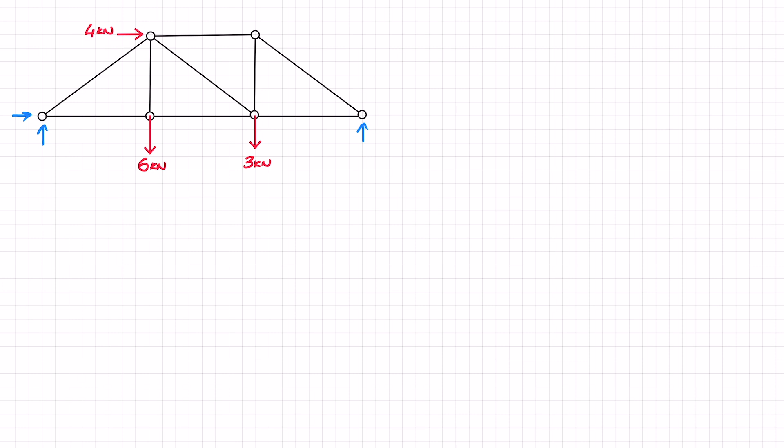Let's start off by drawing a free body diagram. That means that we are going to replace our supports with the reaction forces. So here on this side we have a pin support. Just going to rub that out and draw in its place two reaction forces. And I'm going to rub out this roller support as well and draw in that one reaction force for the roller support. Okay. Now that we have our free body diagram, let's check if this truss is determinate.

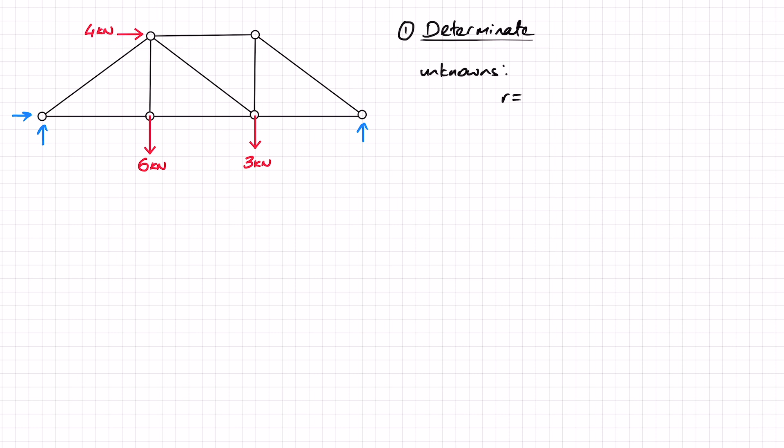So we'll start off by figuring out what we do not know. So what are our unknowns? So we don't know the reaction forces. In this case, we have 3, right? And we do not know the internal forces in the members. In this case, we have 1, 2, 3, 4, 5, 6, 7, 8, 9 members. So together, that gives us the number of unknowns as 12.

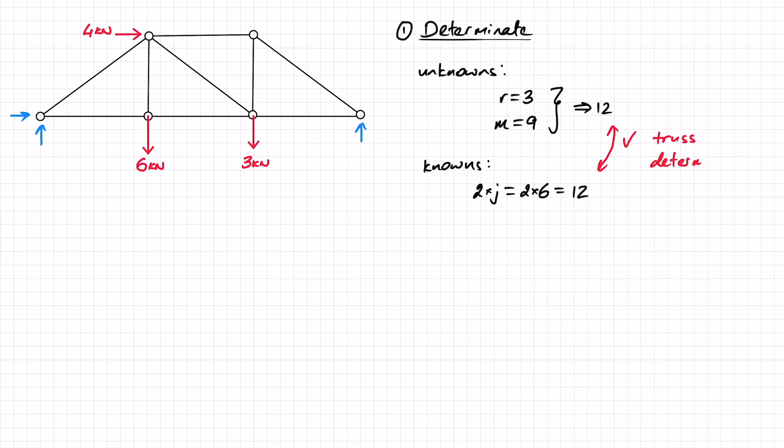On the other hand, we do know that at every single joint, we can write 2 equations of equilibrium. So that means the number of knowns is 2 times the number of joints, which in our case is 2 times 6 joints, and that gives us 12. In this case, the number of knowns and the number of unknowns are equal, so this truss is determinate, and we can solve it using the method of joints.

Before we start solving, let's number the joints and declare our sign convention. So, numbering the joints, I'm going to go with 1, 2, 3, 4, 5, and 6. And as for sign convention, I am going to use the right-hand rule, which means that my positive x, my positive y, and my positive moments are in these directions. Okay, so right hand rule. Now that we've established that, let's move on to finding the reactions.

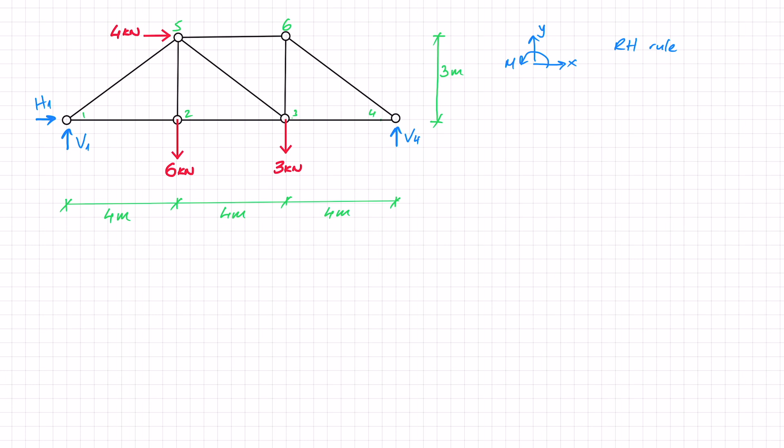In order to do that, I am going to label these reactions. Here I had a pin joint, and I'm going to label this V1 for vertical 1 and H1 for horizontal 1, and here I'm going to call this V4, the vertical force at joint 4. And that's it, we're ready to find reactions.

Let's start here with the horizontal direction. So sum of forces in the x direction equals 0, and just a reminder that this is my positive x direction. So I've got H1 in the positive x direction, and I've got that external load of 4 kilonewtons at joint 5 also in the positive x, so plus 4 equals 0, and H1 therefore works out as minus 4 kilonewtons. And I'm just going to highlight that quickly so that I can easily find it later when I need to.

The next thing I'm going to do is the sum of moments, and I'm going to do them around joint 1, with a reminder that this is my positive direction. The reason I'm doing it at joint 1 is because V1 and H1, those 2 reaction forces, pass through joint 1, meaning they will not contribute moment. I'll have all the external loads contributing to moment and V4 also contributing to moment. This will allow me to find V4.

Okay, so let's start off with this 6 kilonewton force. We can see that it is contributing a clockwise moment, which is negative in our sign convention, and the perpendicular distance from the line of action for that 6 kilonewtons until joint 1 is 4 meters. So minus 6 times 4. The 3 kilonewtons at joint 3 also contributes a negative moment, and this time the distance is 8.

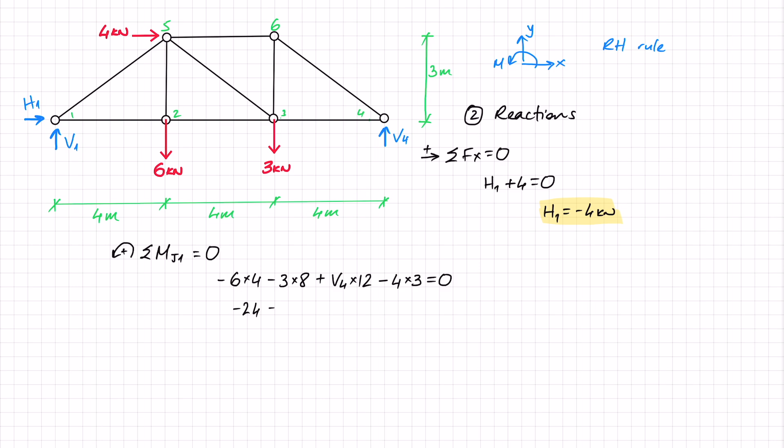Let's work our way through this. So -6 times 4, that is -24. -3 times 8, also 24, so another -24. Plus 12 V4 and -12 equals 0. Let's isolate the V4. So I've got 12 V4. Since isolating the V4 gives me negative and negative on the other side, I can multiply by -1 and it'll be positives on both sides. And here I have 24 plus 24 plus 12, which gives me 60.

60 divided by 12 is 5, and therefore V4 works out as 5 kilonewtons. Okay, let's highlight that as well. And now the easiest thing to do is sum of forces in the y direction equals 0. This is my positive y. So in this case, I've got V1 plus V4 minus 6 and minus 3 equals 0.

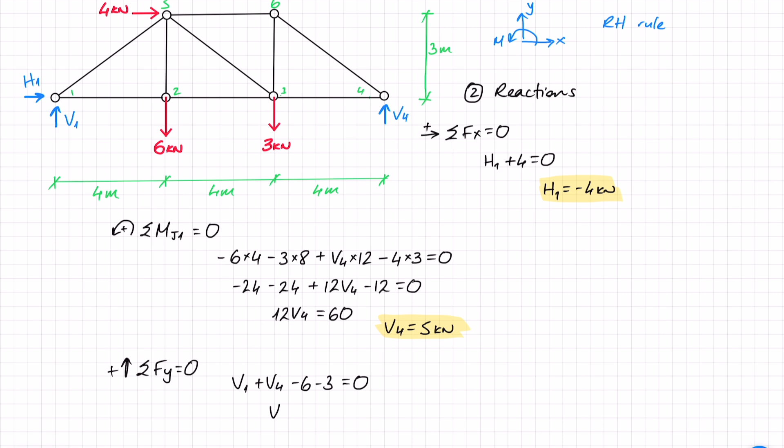So V1 equals 9 minus V4. So that is 9 minus 5. And I end up with V1 equals 4 kilonewtons. So now that I know all of these reaction forces, I can replace them in my graphical drawing. So we said that V4 was 5 kilonewtons. V1 worked out as +4, meaning we assumed the right direction, so 4 kilonewtons.

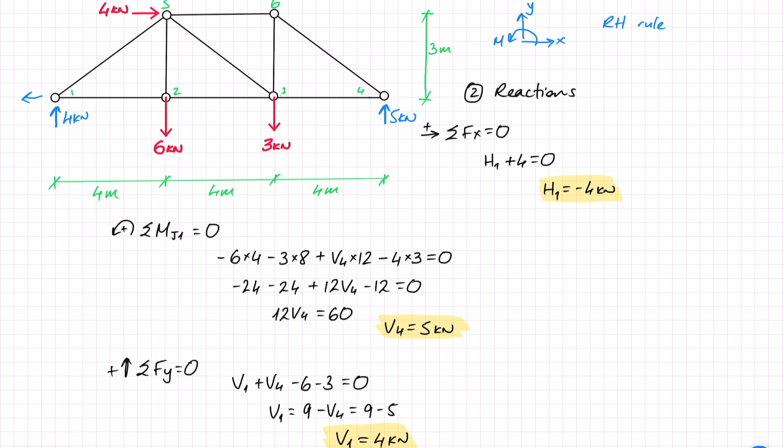And H1 was -4. This means that the direction that we assumed is incorrect. It's really facing the other direction. So what we need to do is just replace this with an arrow going the other way and with a value of 4 kilonewtons. And that's it. Now that we've found the reactions, we can move on to solving the truss using the method of joints. Before we start solving, let's quickly remind ourselves of what the method of joints entails.

What we do is we separate each joint from the members, draw the internal forces, and look at each joint as a system of concurrent forces at the joint. So looking here at the truss that we have, in purple I've drawn out all those forces that we need to find, all those internal forces representing the members. I have in red the external forces that were given as part of the truss, and in blue I have the reaction forces that we just found.

I know that in each joint I can only write 2 equations of equilibrium. So in each joint, essentially, I can only solve 2 unknowns. I will therefore have to start off at a joint with only 2 unknowns. If I look here, quite a lot of the joints have much more than that. For example, 5, 6, 2 and 3 have much more than just 2 unknowns. I can see that both joint 1 and joint 4 have 2 unknowns, and I could start with either of them.

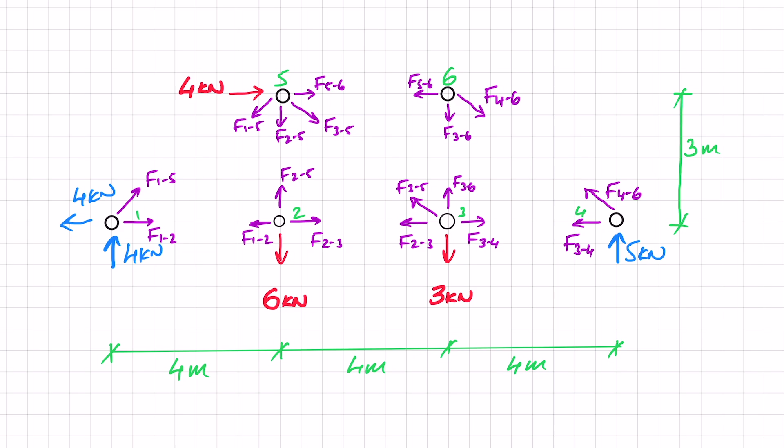Once I've found the members from joint 1 or 4, depending where I start, I will start finding the forces from different joints, and therefore they will also at some point have only 2 unknowns, and I'll be able to solve them. So let's start with joint 1. Looking at joint 1, I've got these 2 unknown forces, force 1,2 and 1,5, and I've got these 2 reaction forces of 4.

Let's start off by solving the sum of forces in the y direction, because in the y direction I only have a component of F15, so only one unknown. So sum of forces in the y direction equals 0. This is my positive direction. So I've got F15 sine alpha, and I've also got 4, that reaction force. Nothing else, so that equals 0. And F15 equals minus 4 over sine alpha.

You can find alpha through trig, or you also know that sine alpha is 3 over 5, and this gives me minus 20 over 3, which we can also write out as minus 6.67 kilonewtons. Okay, and just highlighting that so I can find it later.

I can now move on to do the sum of forces in the x direction equals 0, and now I have F12 in the positive x, minus 4, that reaction force, plus F15 cos alpha equals 0. So F12, which is what I'm looking for, equals 4 minus F15 cos alpha. F15 I already know, because I found it. It is minus 6.67 times cos alpha, which is 4 over 5.

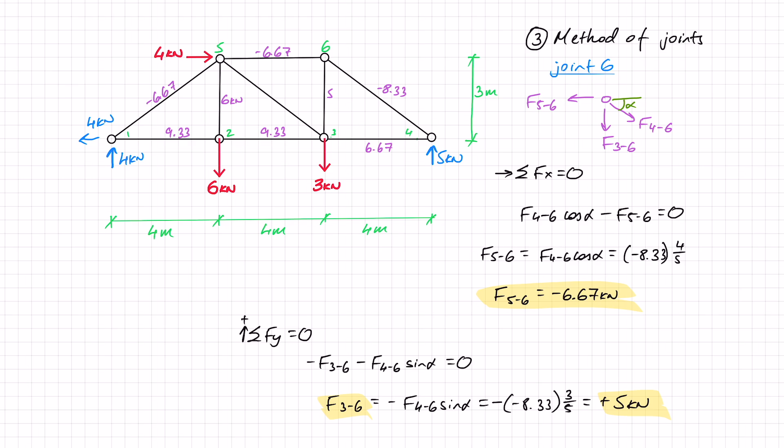Let's write them onto our graph. So 5/6 is minus 6.67, and 3/6 is 5. We can see here that we now only have one member that we don't know, which is member 3/5. We can either go to joint 3 or we can go to joint 5. Let's go to joint 3 and see what's happening there.

So at joint 3, we have f(3/4), we have f(2/3), we have f(3/6), we also have f(3/5), and we have an external force of 3 kilonewtons, and this is angle alpha here.

Let's start off with the sum of forces in the x direction and try not to miss anything, right? This is my positive x. Let's see what I've got in the x direction. I have got f(3/4) in the positive x, I've got f(2/3) in the negative x, and I've also got a component of f(3/5) in the negative x, and this time it is cos alpha. And that is all I have in x, so those three equal 0.

So f(3/5), if I isolate it, it's going to equal f(3/4) minus f(2/3) divided by cos alpha. f(3/4), I know what that is, 6.67, and f(2/3) is 9.33, so minus 9.33, and all that divided by cos alpha, which is 4/5, and that gives me minus 3.33 kilonewtons.

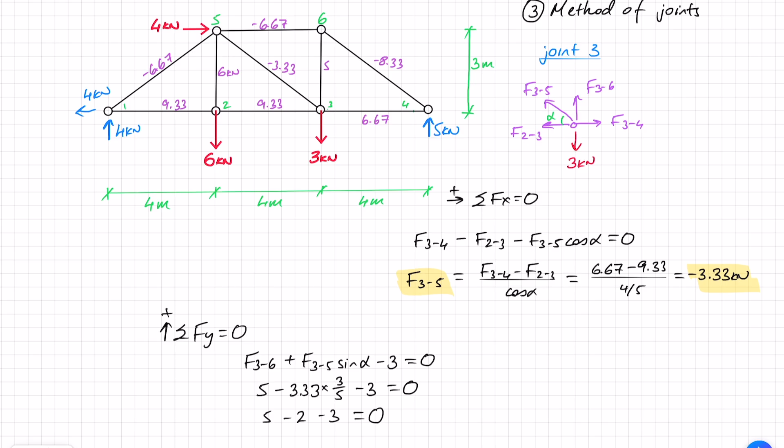So f(3/6) was 5. f(3/5) we just found, that is minus 3.33 times sine alpha, which is 3/5, and minus 3. Let's hope this works out. So what do we have? We've got 5, this is minus 2, and this is minus 3, equals 0. Does it? It does indeed. So that first check gives us a good indicator that we've solved the members in this truss correctly.

Let's not stop there. Let's do some more checks. Let's check what's happening at joint 5. We haven't had to touch joint 5 until this moment, right? We've solved all the forces without reaching it, but let's see what happens there, and, fingers crossed, everything equals 0.

Let's do it. So at joint 5, we've got a force of F5,6. We've got a force of F3,5. We've got F2,5. We've got F1,5. And we've also got an external force of 4 kilonewtons in this direction. Okay. Alpha is this angle here and also this angle here.

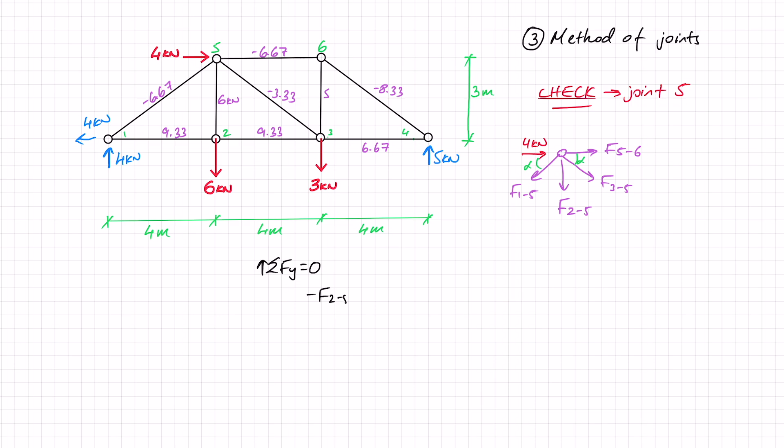Let's start off by checking the sum of forces in the y direction. So in the y direction, we have negative F2,5. We've got negative F3,5 sine alpha. And we've got negative F1,5 sine alpha. Everything else is not in the y direction. So let's have a look at this.

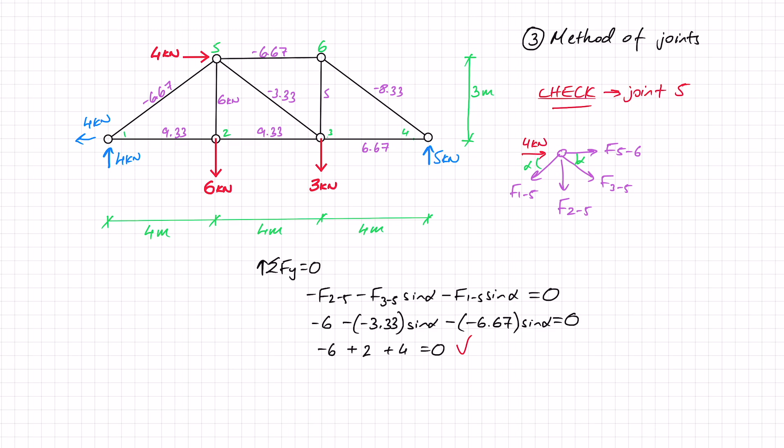F2,5 was 6. So we've got here minus 6. F3,5 was minus 3.33 sine alpha. And F1,5 was minus 6.67 times sine alpha, and that all equals 0. So we've got here minus 6 plus 2 and plus 4 equals 0. Indeed, that works out as 0. So another good indication that my calculations are correct.

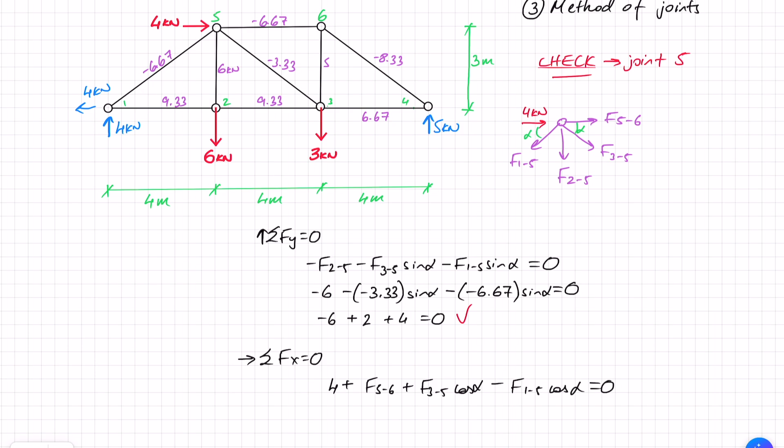We can also check the sum of forces in the x direction. And here we have 4 plus F5,6 plus F3,5 cos alpha and minus F1,5 cos alpha equals 0. So quite a lot of components here. And that gives me 4 plus minus 6.67 plus minus 3.33 times cos alpha, which is 4 over 5, and minus 6.67 cos alpha, which is another 4 over 5, equals 0.

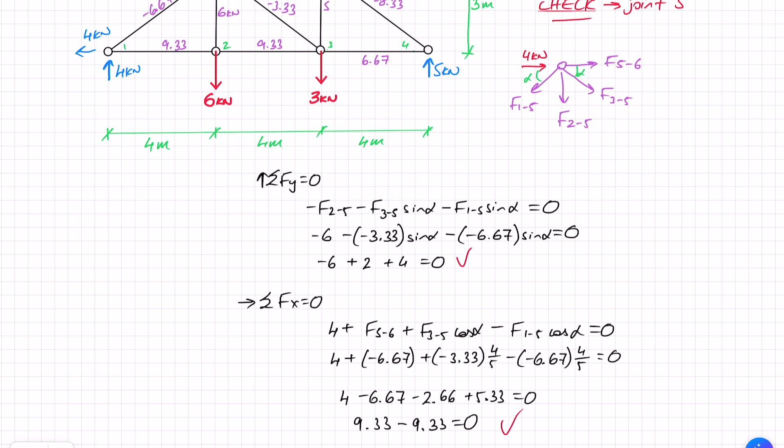And that works out as 4 minus 6.67 minus 2.66 and plus 5.33 equals 0. And if I sum that up, I end up with 9.33 plus another minus 9.33 equals 0, and it does indeed equal 0, which means that I have solved this truss correctly. So just remember, it's important to maintain those signs, and it's also important to check your trusses.